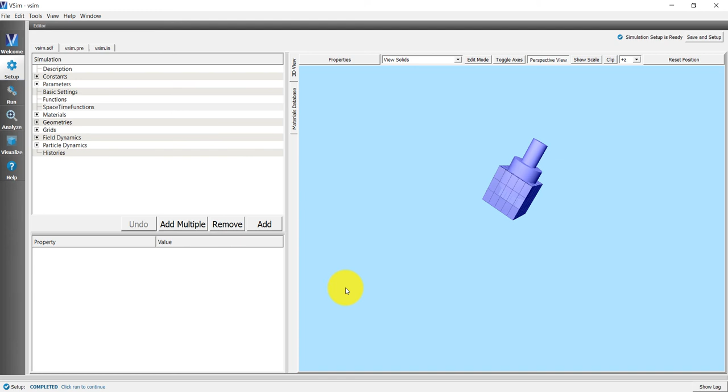So to add particles, you need to expand this particle dynamics option and right-click on kinetic particles. And then this will allow you to add charged particles, electrons, and neutral particles. So let's add electrons. So again, there will be some default name that's already there for you. You can double click and change it. I can just change this to electrons.

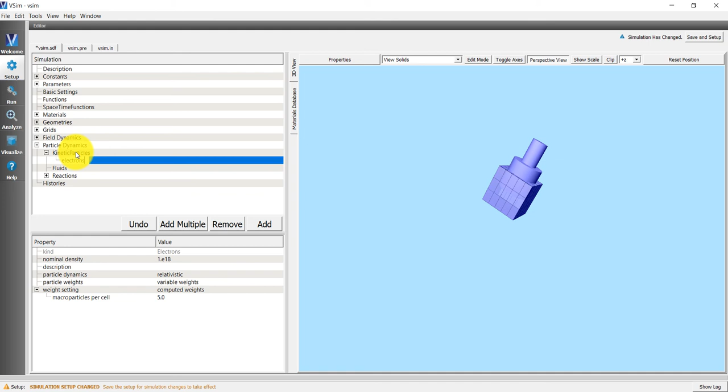You need to establish some nominal background density for that species or for that population. There are different ways to evolve this. It's best just to keep it relativistic. That'll always be correct. You can do different weight settings, so you can do variable weights, constant weights, and managed weights. Managed weights is a very useful option if you're going to be having a lot of reactions and you could lose or gain lots of particles. Managed weights lets you keep the particles per cell within some range. So we're just going to keep this with variable weights.

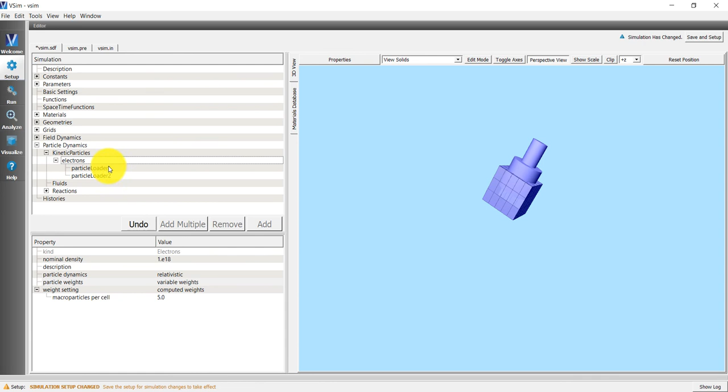Once you add the electrons, you can do many things with them. And when I show you the corona discharge example, I'll show you more of what you can do. But let's just say we wanted to add some particles initially when the simulation begins. Then we would add a particle loader. So you would right-click on electrons, go to Add Particle Loader, and click on Particle Loader. Now you can see you can have as many particle loaders as you want. So I could specify some population in the lower left quarter and a different population in the upper right if I wanted to. So we're going to get rid of the second one.

So under particle loader, the initial density of the population is based on what you put here. So here the default was 1e18 per meter cubed. So we'll leave that number. And this number 1, this relative density here, says that this population will be 1e18. If I made it 0.5, then the population would be half that. And you can even put in a space-time function here if there was some density that was an initial function of space. You can specify the initial velocity distribution.

So if you go up here to space-time function, I could add a new space-time function. We'll call it Maxwellian electrons, M-A-X-E-L. And so V thermal E was the thermal velocity that we defined before. And 0.0 says it has 0 drift. You could put in a drift if you wanted. Now that we've created that space-time function, I could give this a Maxwellian by right-clicking here, go to Add Space-Time Function, okay.

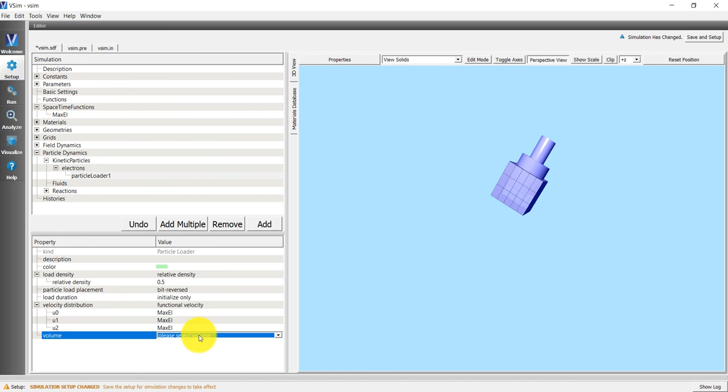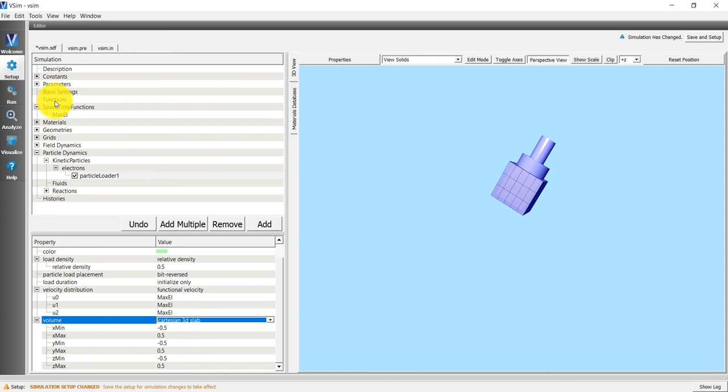Now you have to specify where it's going to sit in the domain. And so to do that, you just double-click here. There's only one option, Cartesian 3D slab. And this is where it's going to be initialized in the domain. You can see that population by hiding the geometries. And we'll hide the grid. And there is my initial electron population. You can see that's it, because when I change the dimensions and where they're initialized, then this changes.

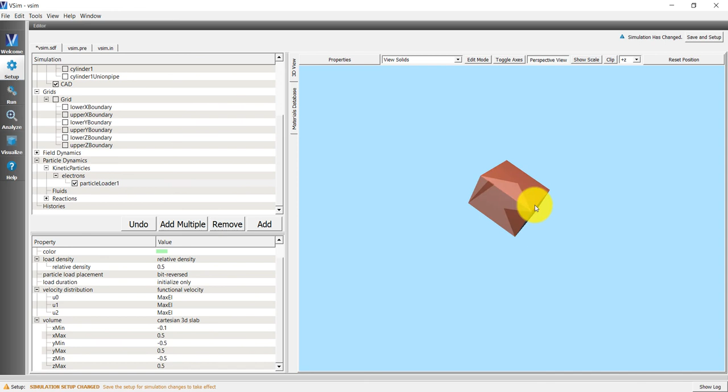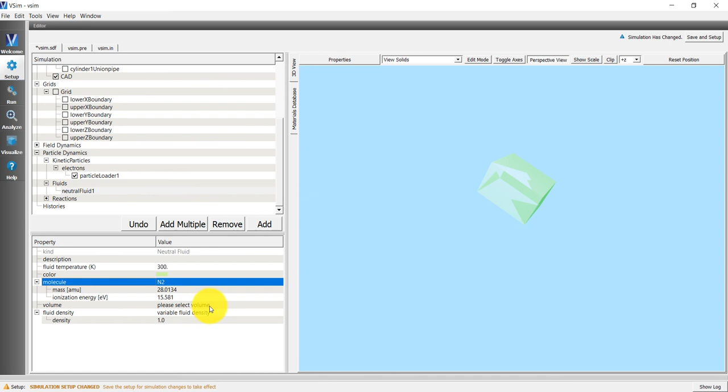I'm going to add a neutral fluid. So right click on fluids, add neutral fluid, and there's my background hydrogen population. You can change that by double clicking here and putting in other species. So N2, for example, and then everything gets pre-populated. Of course, you can also just add a custom species or molecule, but then you'd have to put in the information yourself, like the mass and the ionization energy. Again, you have to specify the volume, and you need to also specify the density. So 1 per meter cubed isn't very many.

Often this density, you could put in a parameter in which the density is computed based on the pressure. And that's what I'll show you in the corona discharge example. That's what I did. Now that we have an electron population and a neutral fluid, you can add a reaction.

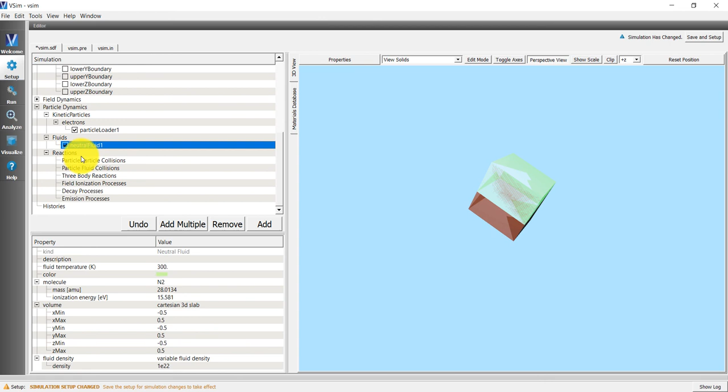So if I expand the reactions option, and also just remember that all of these options and tabs are there because in the basic settings tab we set it to include particles and also to include reactions. These tabs are not here if you don't go into basic settings and include particles and reactions.

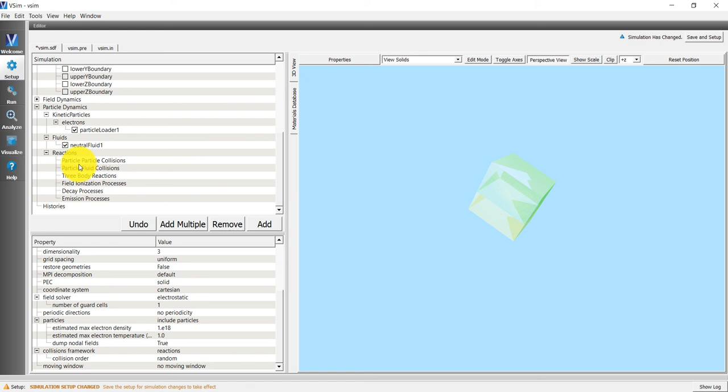Alright, so under the reactions tab, which is under particle dynamics, I can right click here and I can add a collision. So let's add an elastic collision. So this just says that A plus B react to form A plus B. There's no new species, they just bounce off each other with the total energy and momentum conserved.

For A, you can double click here, and there's only one species that we put in, but if you put in multiple species, there would be multiple species under the options. And then for B, that would be the fluid. For the cross section, there are lots of options, but let's just do interpolated from 2 column data set, and I'll show you that in just a minute.

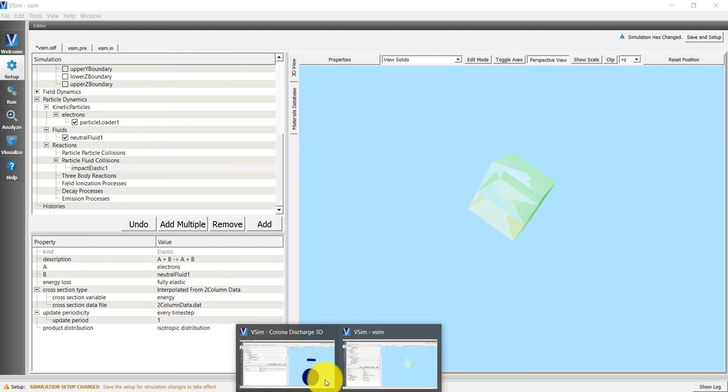Typically, the cross-section variable is energy, and then you have to go find your cross-section table and put it here. And I'll show you what ours is called in the corona discharge example. So let's go see how this is set up in the corona discharge example. I'm just going to collapse everything so that we can do it from a fresh window.

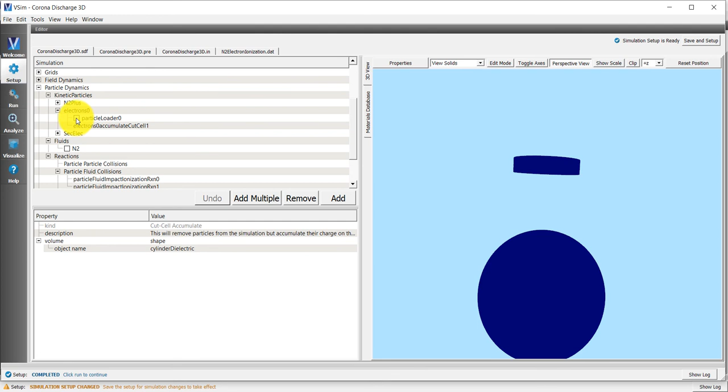So if we expand the particle dynamics option, I've put in 3 species. So nitrogen plus, electrons, and secondary electrons. And for the fluids option, I've put in a neutral nitrogen molecular background. So the simulation gets started with 1 free electron. We can see that free electron if we click on the box next to particle loader, and we zoom in, and there's that electron right there.

So I gave it initial energy or velocity of 0 because I'm assuming whatever energy we give it, it's going to gain a lot more through this potential difference. So I just set it to 0. And how did I just initialize a simulation with 1 electron? So the way I did that was in the volume. If you remember, you have to specify the volume where the particle is loaded.

I used these parameters: x begin particle, x end particle, y begin, y end, z begin, z end. So if we go up and just look at 2 of those under the parameters option, and if we go to x begin particle, I started it at 0, and x end particle is x begin particle plus dx. So the electron will be initialized in just 1 cell, and that's the same with y and z as well.

So y begin, I began it just above the sphere, and then it ends wherever I began, plus dy. So that's how I did that.

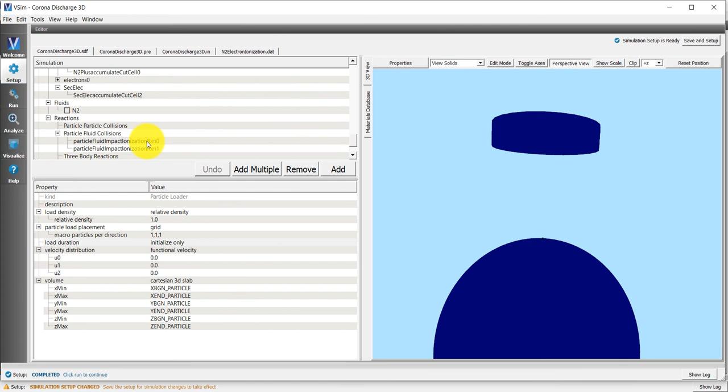Now, there's two more populations here. There's N2 plus and secondary electrons. I don't start the simulation with those species. Those two species form only from reactions. So I've got this impact ionization reaction, which says N2 plus my initial electron forms N2 plus, the electron that's on the left, plus the secondary electron. So I get another electron from this collision.

And then there's another reaction that's exactly the same, except N2 hits the secondary, forms a nitrogen plus ion, and then it forms two secondaries. And that's how this cascading effect is launched.

The cross-section table is here. I went and found an ionization cross-section table for N2, for molecular nitrogen. And I input that cross-section table here, the name of it, right here. And that cross-section table has to be in the same directory as the input file.

So here's a neat little trick. If you hover over this region between this leftmost region where the Analyze, Visualize, Run tabs are, and the setup tree, if you hover there, then you can pull to the right, and then you'll see all these tables that are in there. All these data sets that are in there. Of course, you would only want to open up ASCII data, because these are binary data sets. You wouldn't want to try to open those.

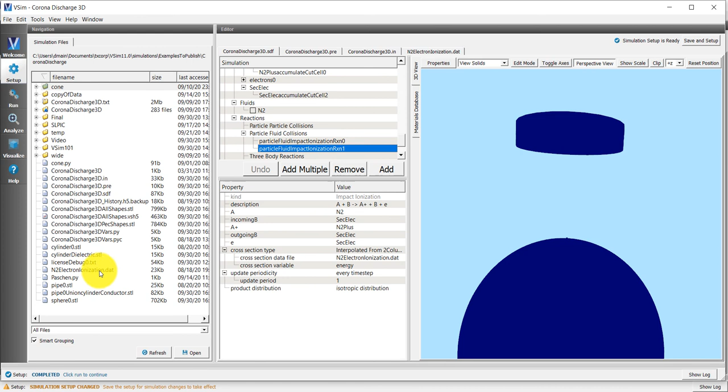But here's my cross-section table. So if I double-click there, then you can see what the cross-section is as a function of energy. So the leftmost data is a two-column data set. The left is energy of the electron, and the right is the cross-section. So you see that the cross-section is 0, and it becomes non-zero only above the ionization energy of about 15 eV. So if we scroll down, then you can see that right around 15 eV, the cross-section becomes finite.

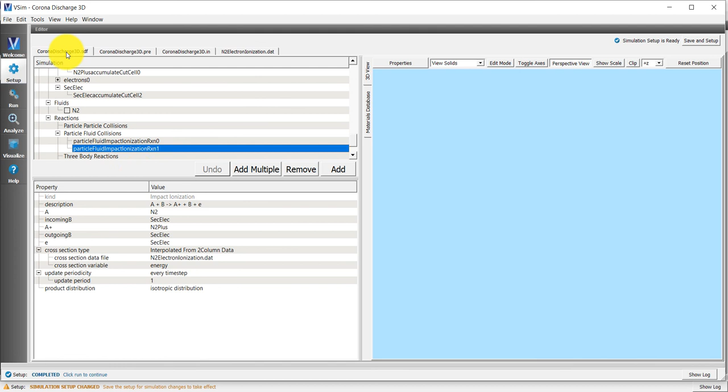Okay, lastly, let's take a look at the boundary conditions. So I only set up one boundary condition. Remember that there is a default boundary condition, and that's absorbing. And the reason that there is a default boundary condition is because if a particle leaves the simulation domain, you'll likely get a segmentation fault, since that particle enters a portion of memory that hasn't been allocated by the simulation. So for numerical stability, if there's nothing that's set up, we want to absorb particles there. You can override that by establishing your own boundary conditions.

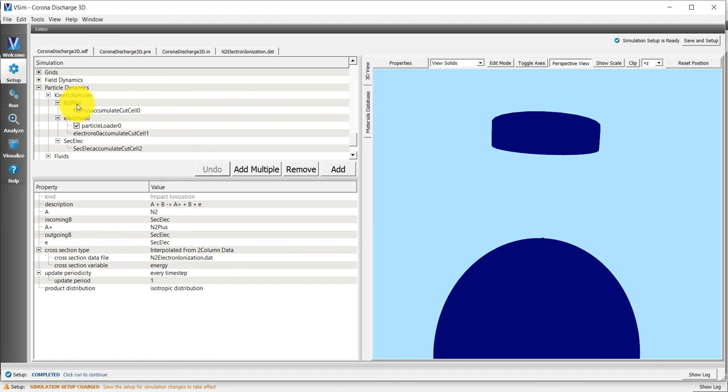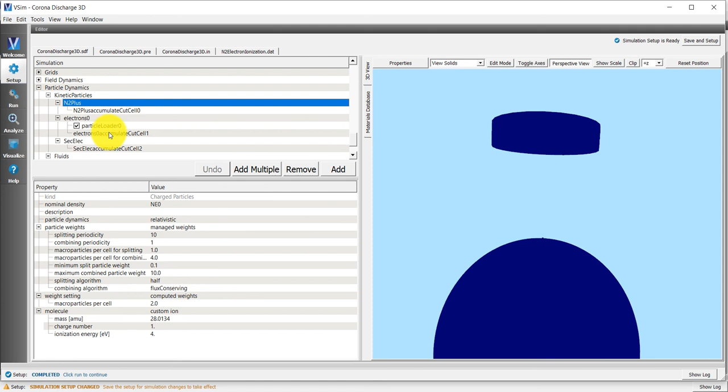So I did accumulate boundary. So if you right click here, then you can do add particle boundary condition. And one of those boundary conditions is called accumulate. So you can do cut cell accumulate. And that's what I did. Cut cell means it's a geometry. So I did cut cell accumulate for every single one of these populations. And I accumulate on the dielectric. So there's my dielectric. So when a particle hits a conductor, it will get absorbed and be neutralized. But when it hits a dielectric, it actually can accumulate and sit on the surface.

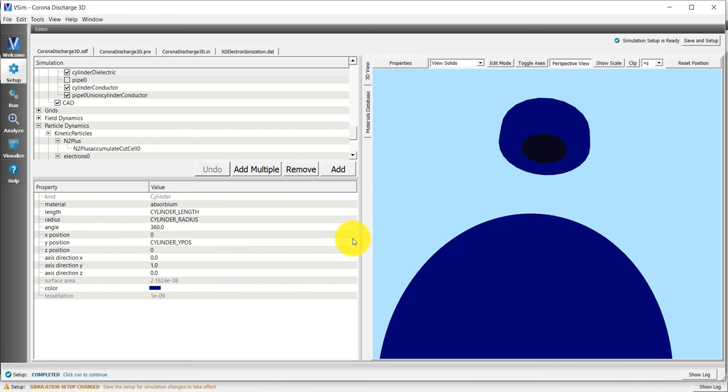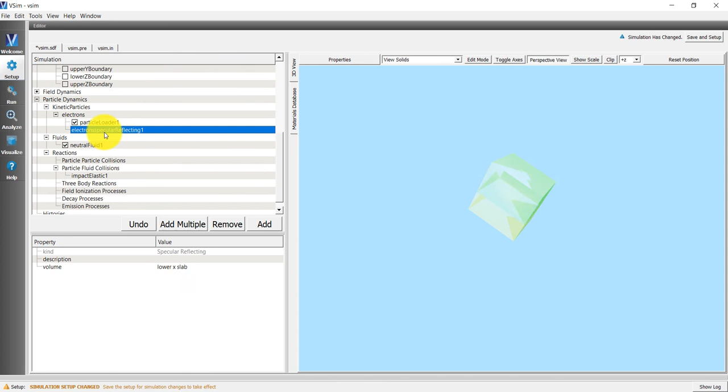And lastly, let me just go over a few more boundary conditions that you can add. So if we go back to vsim.sdf, and I right-click on electrons, and I hover over Add Particle Boundary Conditions, these are all the boundary conditions that you can add in the visual setup. So suppose that a particle hits a boundary and it just bounces off that boundary. It goes back into the domain, like a racquetball hitting a wall. Then you have to select what surface it'll bounce off of. So this is saying when it hits lower x, it'll bounce. And then you could add a different boundary condition.

So we have to add boundary conditions for any geometries. So you can do an electron cut cell absorb and save, and then it'll ask you to select the geometry down here. If you don't select the geometry, you'll get an error. Absorb and save means that when a particle hits that boundary, information about that particle will be saved, which you can then use in a history. And I'll show you how to set up histories in another video.

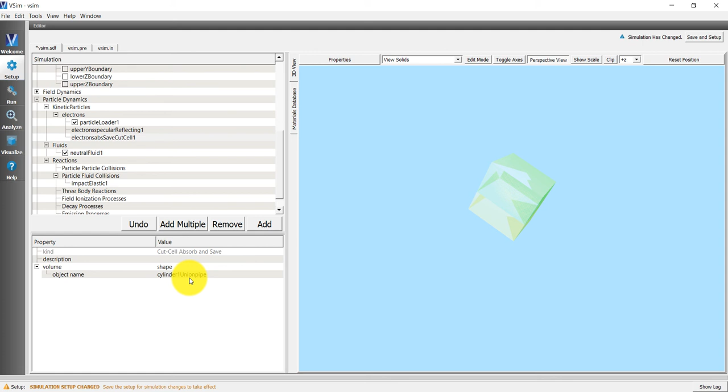But basically, in this case, when a particle hits this boundary up here, this geometry, information about that particle will be saved, such as the charge, the time that it hits, the location that it hits, the velocity and energy that it hit at, etc. So that's a very handy thing for setting up histories.

Okay, so that concludes this video in which I went over how to add particles, particle boundary conditions, and reactions. In the next video, we will continue to cover the basic steps needed to set up most simulations.